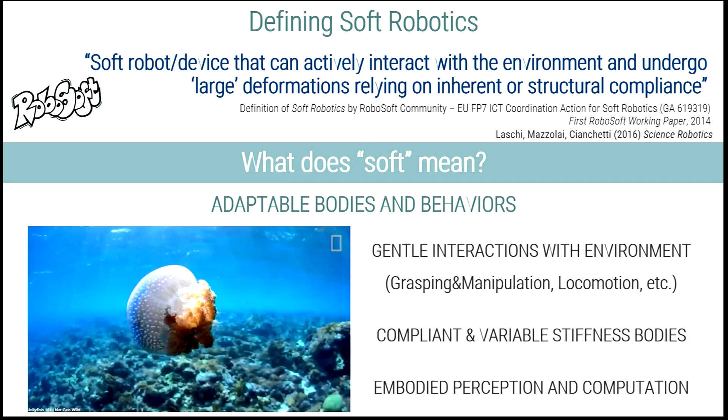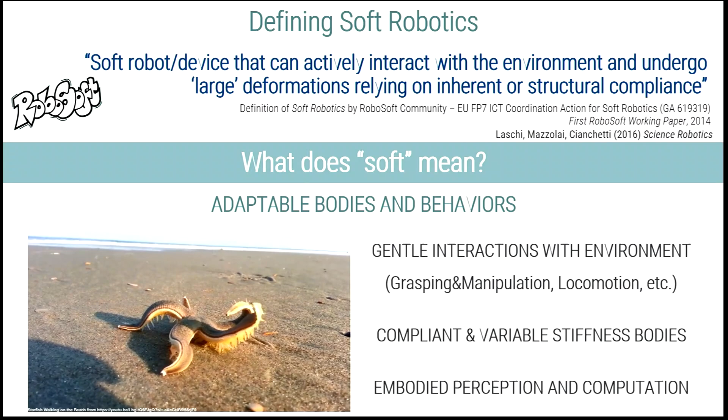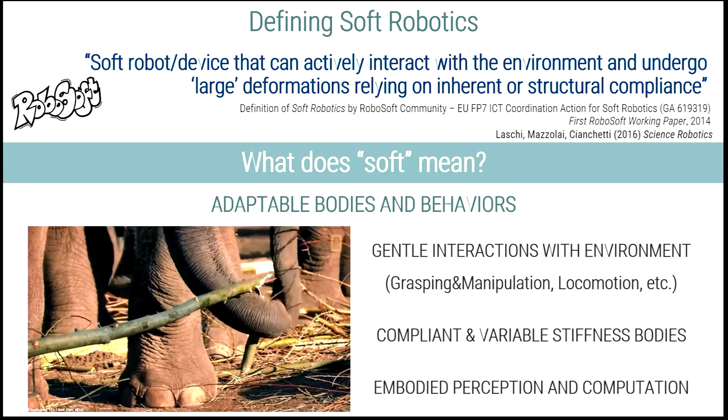I would like to start by briefly defining soft robotics. Soft robots are machines that can actively and gently interact with the environment by deforming their bodies and behaviors. What is very important for these robots is their compliance and variable stiffness, in order to apply force and interact with the environment, but also an embodied perception and computation that is distributed into their bodies. Soft robotics is intrinsically interdisciplinary, deeply based on bioinspiration, and it's a rapidly growing field with interest across science and technology.

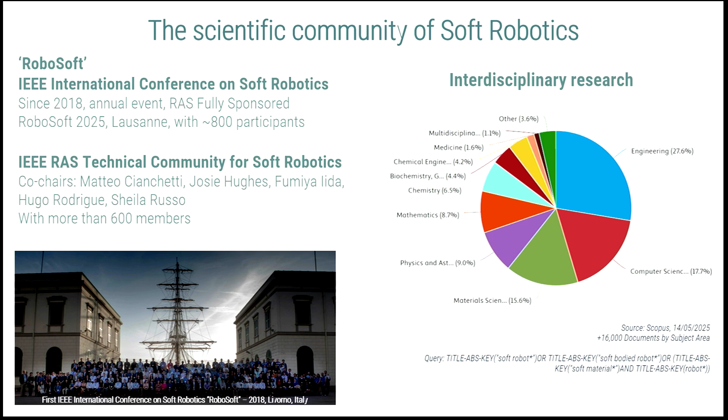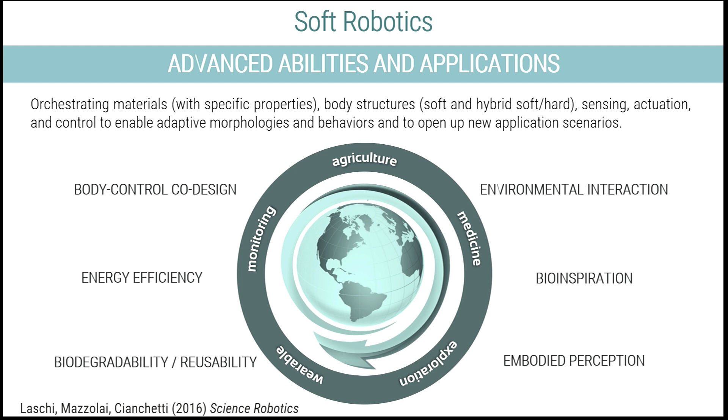So the goal is merging basic science and applied research. Our approach is orchestrating materials, body structure, sensing, actuation, and control to enable adaptive morphology and behavior, but also to open up new application scenarios. Our community is addressing several scientific and technological challenges, such as improving body control and co-design, and proposing solutions that are more sustainable and more integrated into natural environments. This is some of what our speakers will discuss in their presentations.

So we have four excellent speakers. The first is Robert Katzschmann, assistant professor of robotics at ETH Zurich. His interest is in proposing and developing lifelike machines and even biohybrid systems in order to improve the abilities of soft robots.

The second speaker is Hugo Rodrigue, associate professor at Sungkyunkwan University in Korea, whose research focuses on improving the performance of soft actuators, in particular pneumatic actuators, to improve their ability and usability, and consequently their impact in real environments.

After that, Cynthia Sung, associate professor at the University of Pennsylvania, is an expert in developing origami-inspired structures, as well as the computational design and fabrication of soft robots, in order to improve interaction, making it more fluid between robots and the environment, even in an unstructured environment.

Last but not least, Wenzhen Yuan, associate professor at the University of Illinois Urbana-Champaign, is an expert in tactile sensors. The goal is to improve the perception capability of our soft robots to improve interaction with humans, but also with the environment. No doubt they will inspire us with their vision and their work. Please join me in giving them a warm welcome, and we can start with the first speaker, Robert Katzschmann.

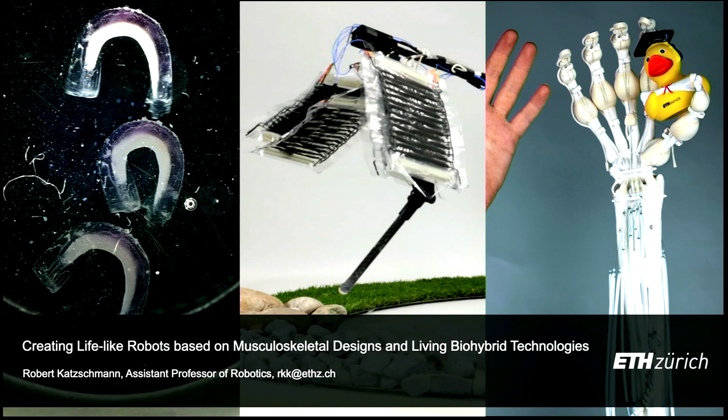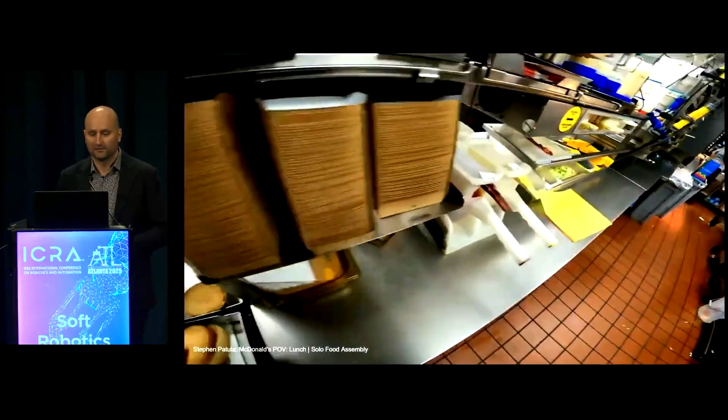I'm looking forward to talking a bit about musculoskeletal robots and biohybrid systems. What you see here is a YouTuber who manages to get millions of people excited about what he does every single day, which is assembling food at McDonald's. I find this extremely exciting because we cannot build robots that can do anything like this.

We also don't have robots that can actually clean up our room, clean up the mess and the unstructuredness of our world. So in the context of understanding what it means to do soft robotics research, we've been looking into trying to understand how we can tackle this world and grasp objects in it.

One of the recent things we started doing is poking at things, literally taking objects that are deformable, such as a cube or other items, and then trying to scan them in high resolution, understanding how we can build up a data set that gives us all the information about the deformability and interaction of these objects in the real world.

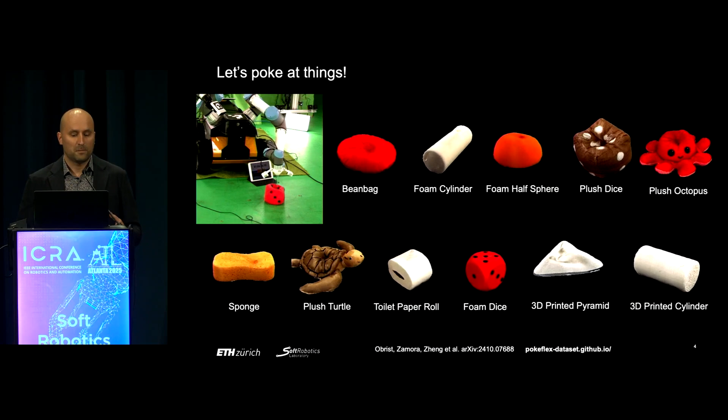So we're trying to understand, can we actually make a data set that can be loaded into your favorite simulator, and you could start using this to take any object you're curious to interact with, and it's not rigid anymore, but deformable. How can we make use of this? You can start studying many different ways of looking at material parameters for these objects.

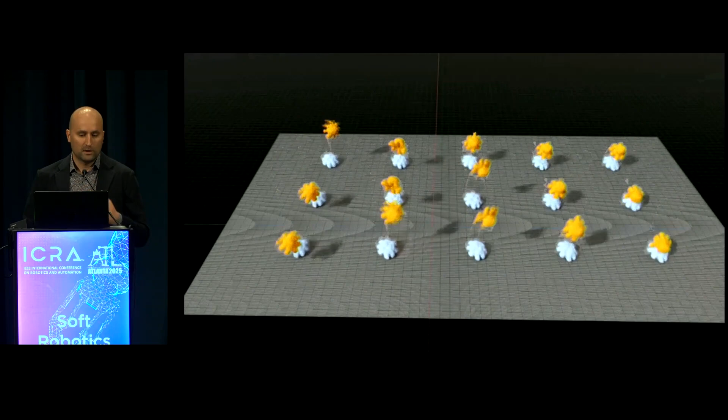So for example, here there's the same sort of little octopus plush, and we have our mesh from our high resolution data capture, and now we're starting to understand what's actually the material parameters of this.

But taking a step further, if we want to now grasp these objects, will it be at McDonald's, or will it be in our home? Can we just use simple grippers?

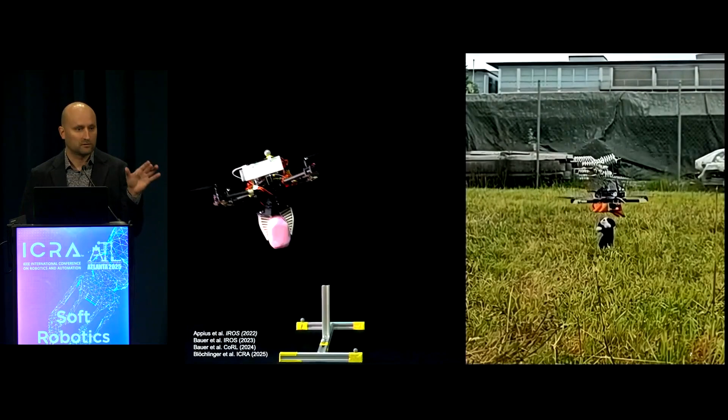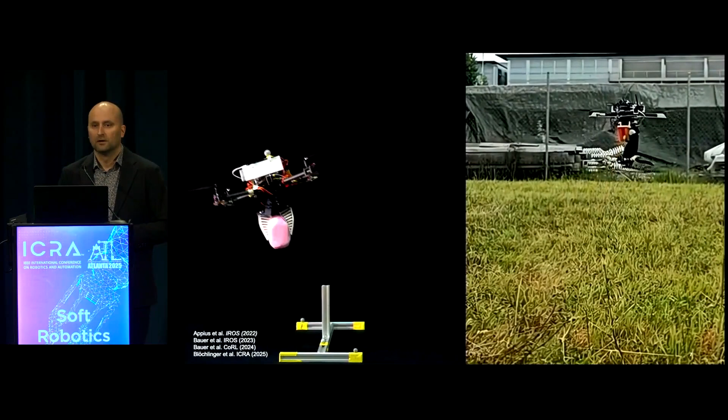Well, we've been trying to do this for a few years now. We've, for example, been taking simple two grippers with motors on them and deformable structures, trying to use them to pick items from the air. It works quite well, and the simplicity in the grasping actually allows you to simplify your approach a lot, so we can quickly pick up items, we can fly outside here, we put a vision stack on top.

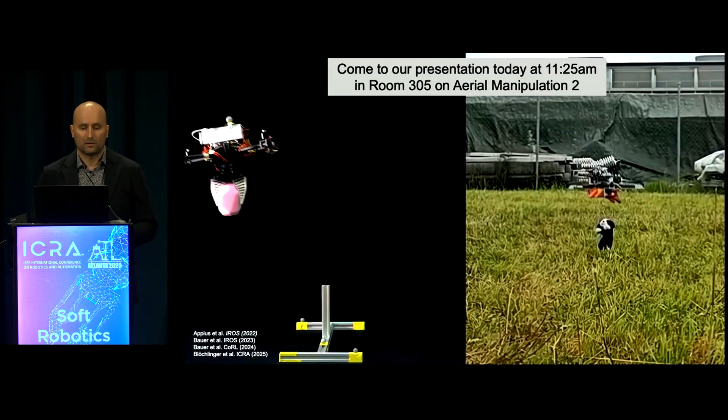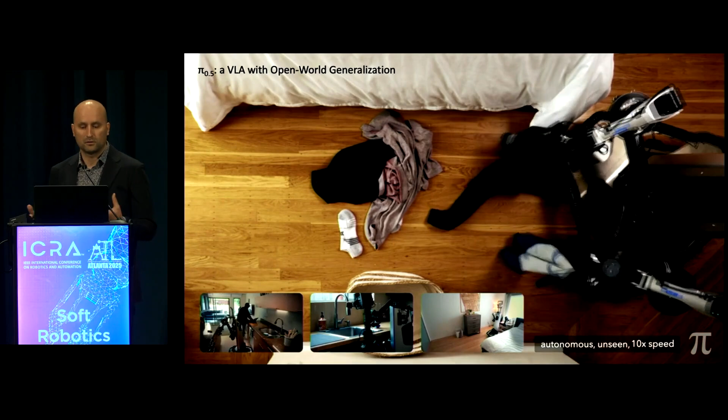But really the question is, can we clean up the room with these simple grippers? Well, Physical Intelligence, a company from San Francisco, is trying to do exactly this. They're trying to use simple grippers, two of them, to clean up our room. What I'm trying to say here is it's not really quite there yet to do things at McDonald's or more complicated things, I would say.

So we take inspiration from soft robotics. In soft robotics, we have various developments in gripping, in underwater locomotion, also in locomotion on land, and even for flying. In all of these technologies, we're trying to find the right combination of softness and rigidity.

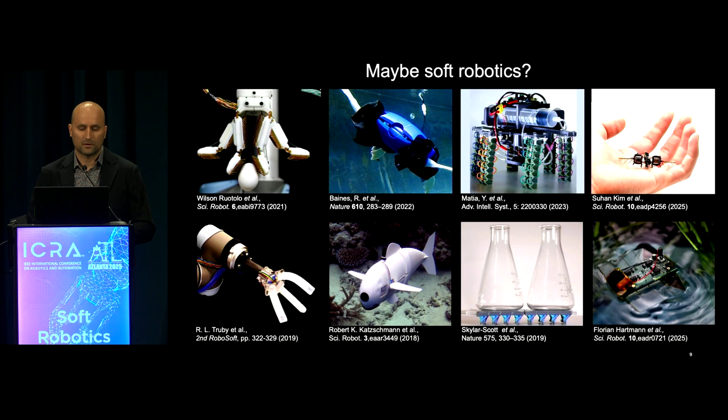And we at ETH Zurich, we're trying to think, can we really use these soft robotic technologies? Can we couple them with what we know from rigid robots? Can we also take inspiration from nature to build robots that combine the best of these three worlds? We call them musculoskeletal robots because they have a skeleton, but they also have muscles.

So this is how we're going to tackle this, and this is going to be basically the key things I'll cover today in this short keynote. First of all, I want to tell you a bit about how we're looking into biohybrid muscles and how we use them. It's a combination of engineered skeletons, which are not living, and living muscles that we place into these skeletons. Then we also look into how we can make non-living muscles that may also allow us to build systems that are more compliant and better to interact with this world. All the way to building the complexity of musculoskeletal systems through 3D printing, and how can we give these systems autonomy and make them dexterous.

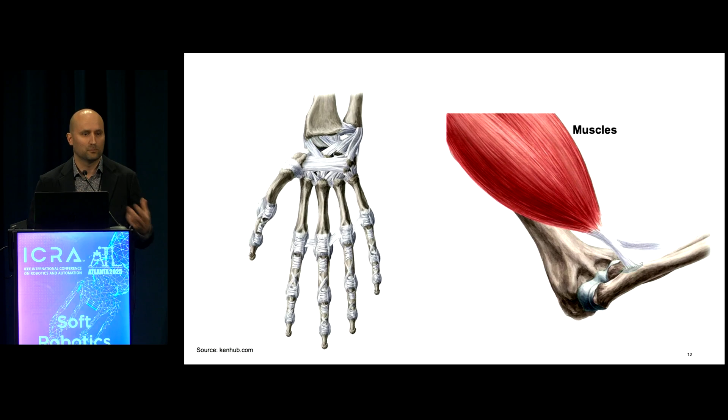So usually I like to say there's all these elements that we can take inspiration from in our human body, or in any animal for that matter. And the one key thing among all of these building blocks is the muscle. The muscle really makes the difference here. Without the muscle, we can't move these robots. And by muscle, I don't just mean a motor, it has to be more than this.

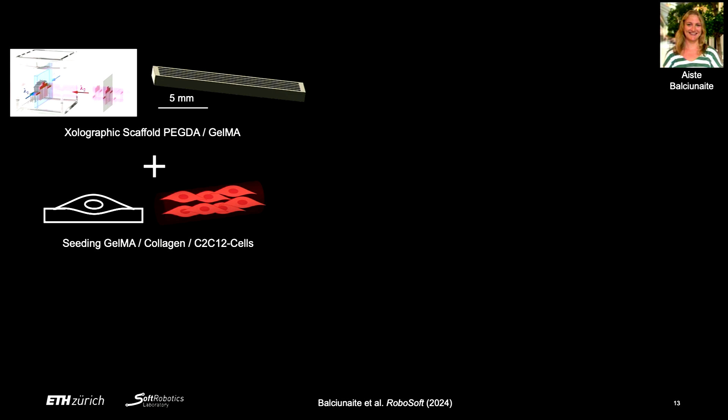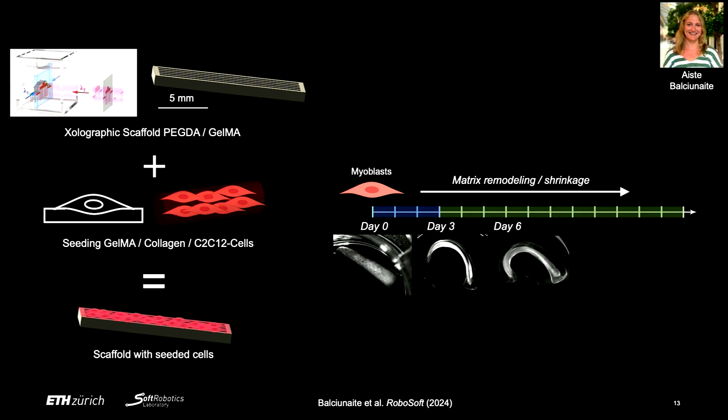So one of the things that we've been doing is trying to build these muscles from cells. Here we're using a technique called xolography, which allows you to print different scaffolds with fine grooves, and then we can place cells into these. These are immortalized cell lines from a mouse, coupled into these scaffolds with seeded cells. What we get in the end is this combination of myoblasts that we start maturing from day 0, and we get this remodeling of these structures, and after 14 days we actually get a myofiber out of this.

So it looks like this: we have this swimmer with a myofiber shown here in white, and this is swimming in real time in a liquid. Now, what do you think is going to happen if I greedily keep increasing the stimulus that I give to this muscle? Any idea?

Well, it will start sort of like cramping up. If I go beyond these 5 Hz actuation, I will actually see that this muscle will not be able to swim anymore because I exceeded the ability of the calcium channels to open and the biological muscle to function the way it's supposed to.

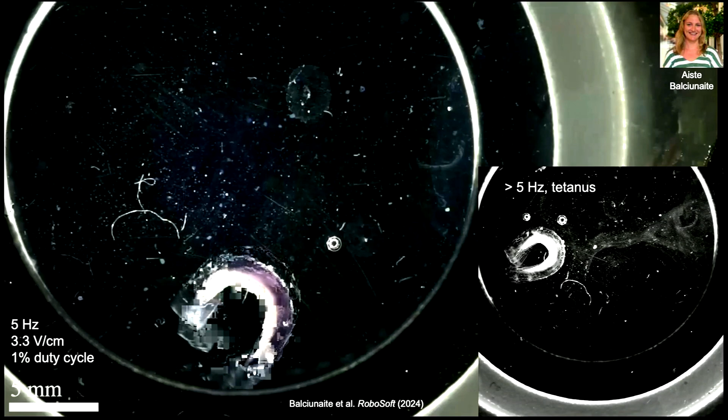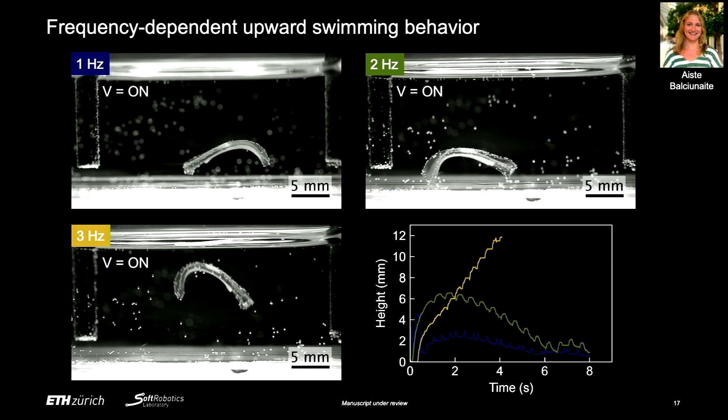We could do other stuff. We can, for example, do jumping. We can do walking. We can also do frequency-dependent upward swimming, and we can look at how well we can swim upwards at different frequencies with these swimmers, and use these constructs in different combinations. So we're trying to figure out how we can actually make these a controllable system. But we're still, I would say, a long way away from using these kind of systems for building a full leg or a full hand for that matter.

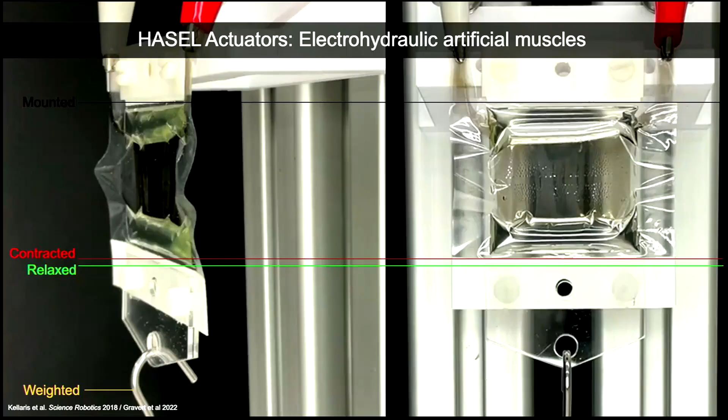And I was teasing at this, and I want to get to that result faster, so we cannot wait for the development in biology to make progress on this. So we also shifted a bit towards the question of, can we instead make these electrohydraulic muscles? What does it mean to make electrohydraulic muscles?

Well, essentially, we use a technology that was developed at CU Boulder by Professor Keplinger, and we're building on top of this idea of making flexible capacitors that have liquid in them.

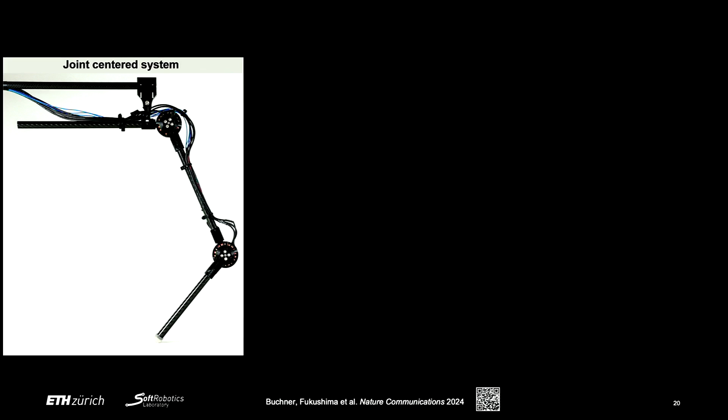And what we really want to show here is we want to make a comparison between what you traditionally know as an electromagnetically driven system, where you have multiple motors in a design, and you would have an encoder in this design, you could have a gearbox in there, it could be a direct drive, but this is the typical electromagnetic system. And we wanted to compare this to a system that uses these HASEL technologies in large packs. So we have many of these HASEL packs combined into antagonistic groups of muscles and then attached by tendons to your structure. And we can do also self-sensing with these units.

And what we can basically do is we can take these electromagnetic motors and now replace them with a contractive muscle. So basically, I don't have anymore a unit that just rotates and produces forces, but instead I have a unit that can contract and also inherently have the ability to be compliant.

The same thing is that I don't necessarily need to use an encoder. I can replace this encoder, which typically lives in the joint of our robot design, and instead I just sense directly in the muscle my contraction amount. So how much force am I applying, or how much external disturbance am I taking up?

And similarly, I also can take the idea of not needing to use a linear transmission anymore, which would basically mean I don't need to use gearboxes, planetary gear sets necessarily. I can instead just take my muscles and attach them with multiple tendons wherever I need to my skeleton. So then I suddenly also have the ability to design my joints in a more free way. I don't have the motor anymore in the joints. I have the muscles packed around my skeleton.

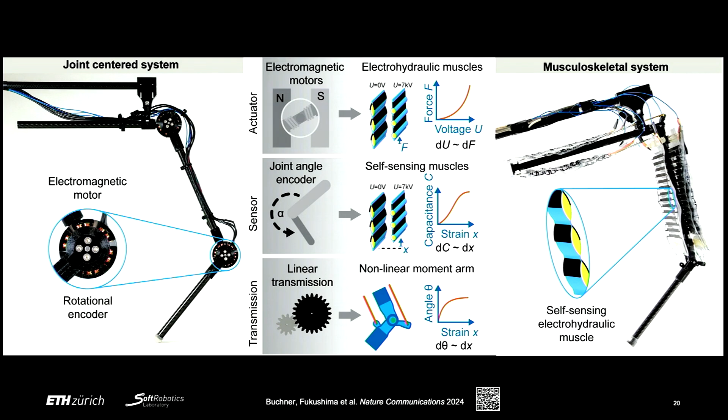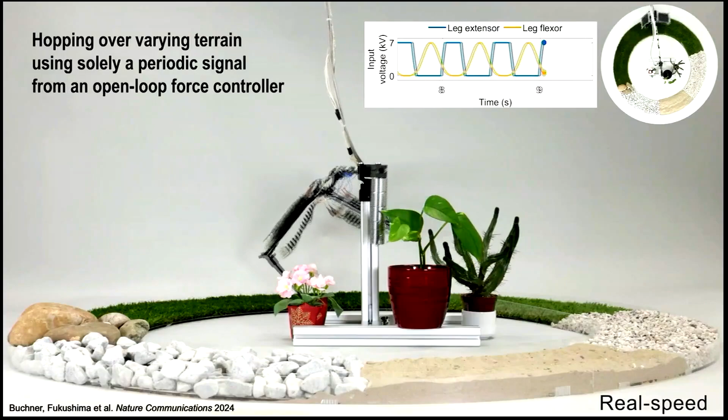So here is an example of how this thing can jump. So you basically have a multitude of these different muscles, and it goes over our little fake garden environment. And so here we started working on just getting one single leg to work.

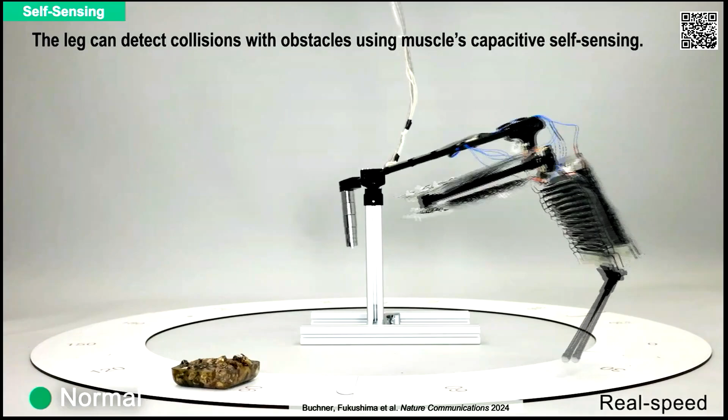Another thing we can do is we can also do closed loop control. So I can have this thing run against an obstacle, and it changes the capacitance. And from this, I can learn, okay, I have a change in capacitance, and this change detected tells me to change my policy of how I jump over my terrain.

One problem with HASELs is that we still have not figured out how to make them also extensible, so they are not really stretchable beyond their natural length. One thing we've been working on is, instead of having just a pure muscle with tendon which gives a limited motion range, can we couple this with clutches, so you have a muscle with a clutch, both relying on electrostatic effects, and get a much larger motion range? If you're curious, come to our talk today at 10 o'clock.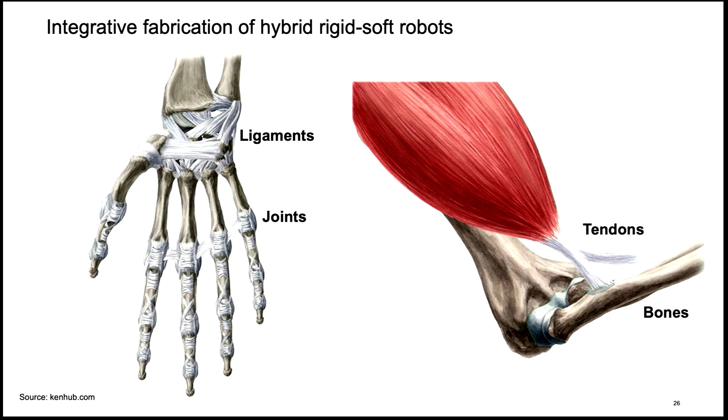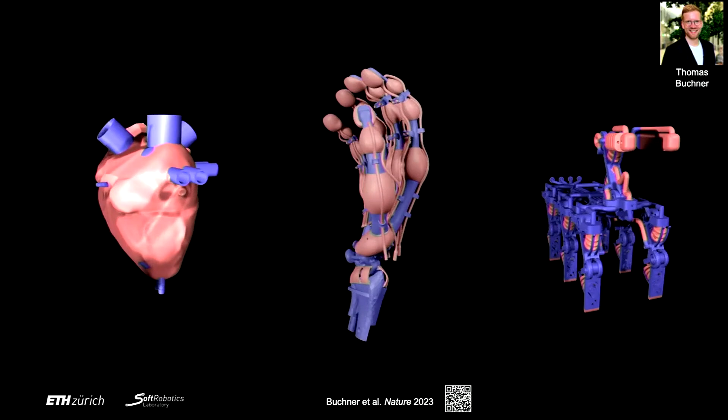It's not only muscles, it's also all the other elements we need to build to achieve the goal of building musculoskeletal systems. One thing we looked into is, instead of using just traditional fabrication techniques, can we print it all in one shot? Could we build a heart, a hand, a walker, all in a single technique?

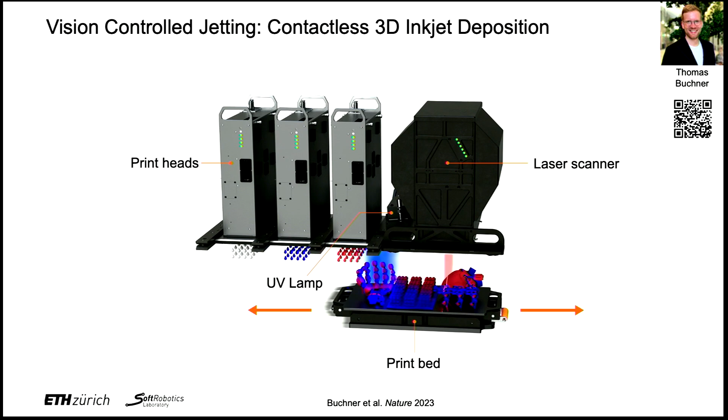For this, we've developed a system called vision-controlled jetting. With vision-controlled jetting, we can now contact-free deposit droplets of functional materials. So we can take a hand, slice it up. This hand has all the different features that I'm curious about to replicate. It was actually a scan of a human — everything you see in terms of the skeleton was a human hand scanned in.

Then we print layer by layer, and in every single layer we scan the surface, find the unevenness, and compensate for it in the next layer. This way we can now start using very different types of polymer technologies.

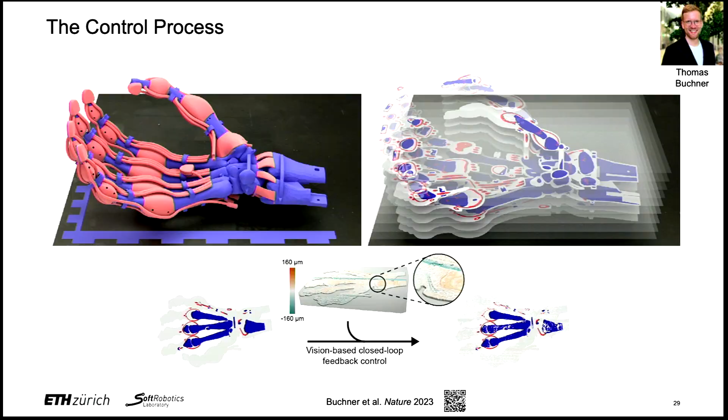We can, for example, make a walker with all of its cavities. We can make hands with capsules, tendons, and ligaments. And then we can make these things actually articulated and make them move. So this is a pneumatic walker that's trying to find its box here, and you can also make a hand that can be articulated in the same way.

We got quite excited after we started printing the first prototypes of these hands. We started making many, many iterations of robotic hands, trying to understand how we can couple tendon actuation, ligaments, and so forth into these designs.

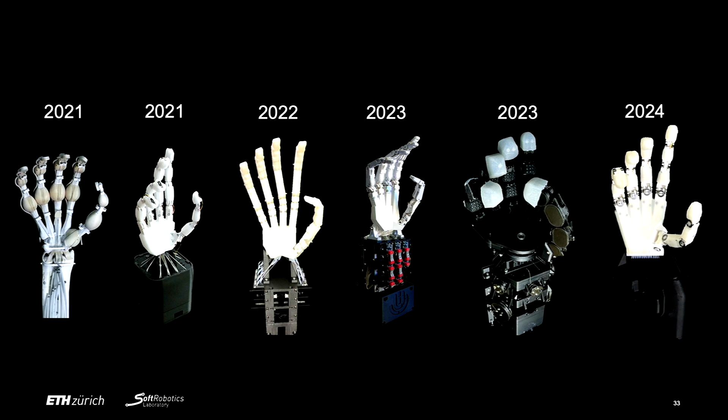We've now been at the point where we're starting to do a lot more in the direction of imitation learning. We're using these units to, for example, manipulate objects or close boxes and teleoperate these systems. We also released a system called the Orca hand, an open source design that you can reproduce with all the instructions of how to make it, and you can use it for reinforcement learning or imitation learning.

We've also been looking into giving these systems the ability to, for example, grasp a brush. We use an Ego4D pre-trained encoder to understand what's happening here and give this hand the ability to succeed in these tasks.

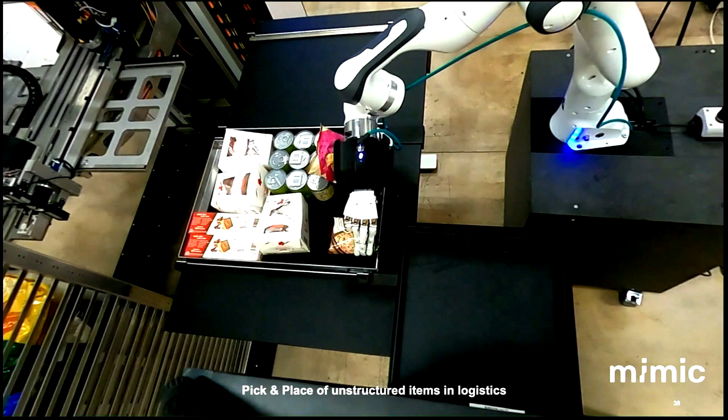Mimic is one of the spin-offs in Zurich from our lab that has started to commercialize these ideas. They're interested in doing, for example, automated tray picking — using this hand to automatically pick up objects and put them from one tray into another.

I've only gotten 12 minutes today, so that was a little glimpse to wrap it up. I showed you a bit about the biohybrid technologies, just a small insight into what we're doing. We're building many more different muscle technologies, looking into building systems from this, and we've also printed and built dexterous autonomy algorithms for these systems.

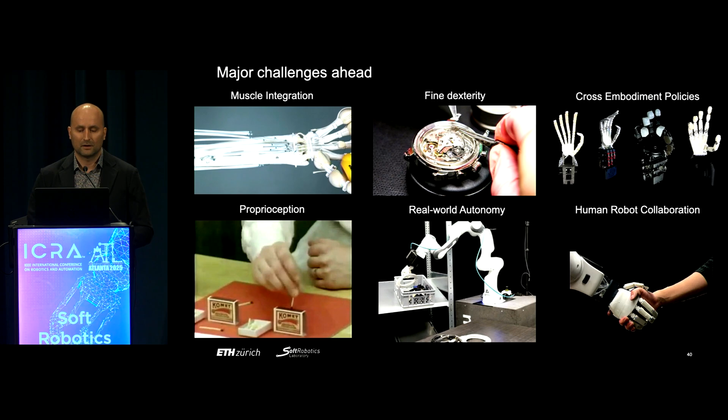In the future, we will have to make muscle integration really happen on all of these systems even further, show that we can do fine dexterity with these, cross-embodiment policies, proprioception, true real-world autonomy. We've already started doing this, as I showed you, and then eventually also do better human collaboration. I'll now open for questions. Thank you very much.

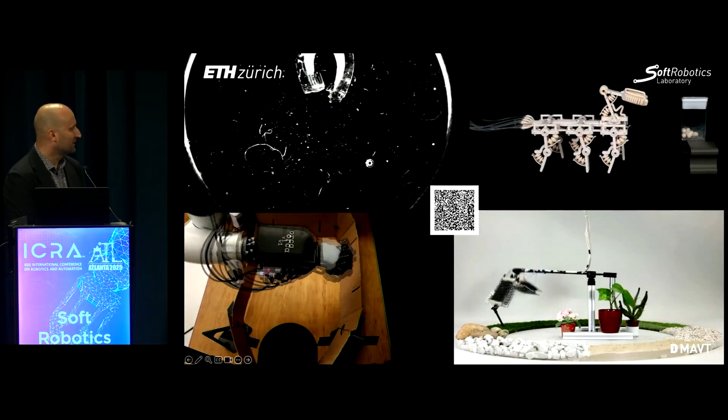Thanks for the inspiring talk, Robert. I'd like to ask about the sensing aspect of the electrohydraulic muscle. I assume you use capacitance sensing to measure the length. I wonder how accurate it is compared to using an encoder for a motor, and how accurately you can control the electrohydraulic muscle for position control.

The beauty is that the major challenge is not so much about accuracy. We used it, for example, for closed loop end effector control, so we can run it, and we can still use encoders. I'm not saying you don't need encoders. We coupled the capacitive sensing with encoders together, and we were able to do trajectory following of different types of trajectories fairly accurately.

I think it's a nice coupling. The capacitive sensing is our way of getting a coarser understanding that there is a force disturbing our system, and we can act on it. We still have more work to do to directly translate this by itself into precise motion. The encoder already gives us this in the joints. So this is still open work, but I think it's normal that with a compliant system you have to be okay with sometimes less precision.

Maybe a quick follow-up question. When it's zipped, can you still sense the capacitance? Is that true, or can you only sense the capacitance when it's unactuated for the electrohydraulic muscle? I'm not sure I understood your question, can you say this again?